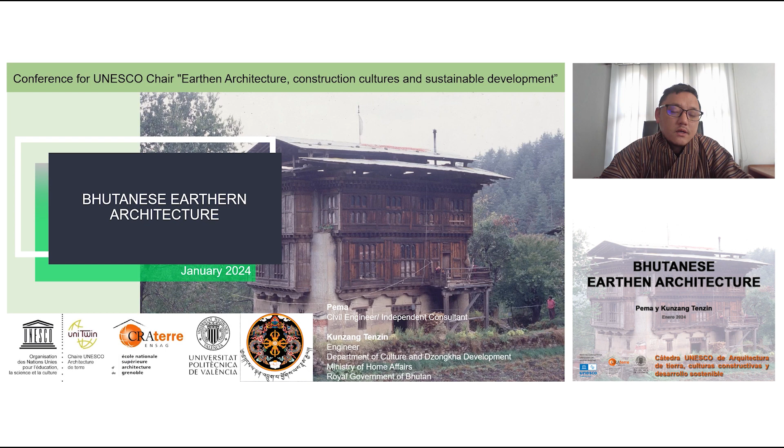First and foremost, let's discuss about Bhutan briefly. Bhutan is a small landlocked country in the eastern Himalayas in South Asia. We are bordered by China to the north and by India to the south, east, and west. We are a population of around 700,000, and the total land area is about 38,394 square kilometers, with altitude ranging from 150 meters to 7,550 meters above the mean sea level.

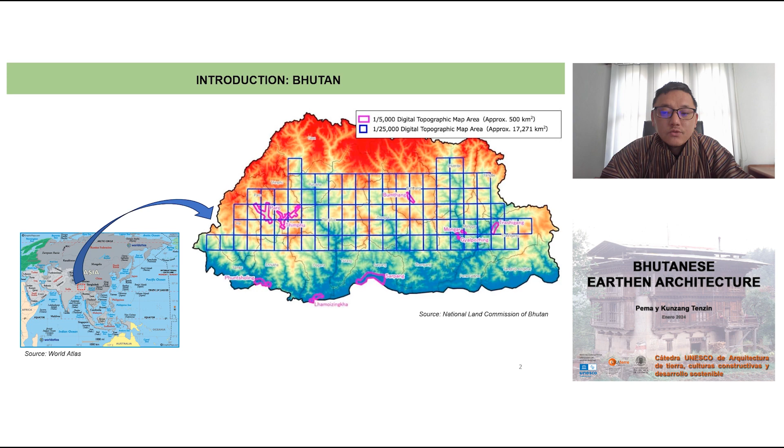Bhutan is well known for the development philosophy of gross national happiness. There are 4 pillars: sustainable socio-economic development, environmental conservation, and preservation and promotion of culture, all under the framework of good governance. I share this insight to emphasize that the thriving traditional construction practices in Bhutan are deeply rooted in the foundation laid for the preservation and promotion of culture. The Bhutanese vernacular houses play an integral role in shaping the unique cultural landscape of Bhutan.

Before we delve into the tangible aspects of earthen architecture, I would like to emphasize the pivotal role played by the intangible cultural heritage and expression in sustaining our traditional construction practices.

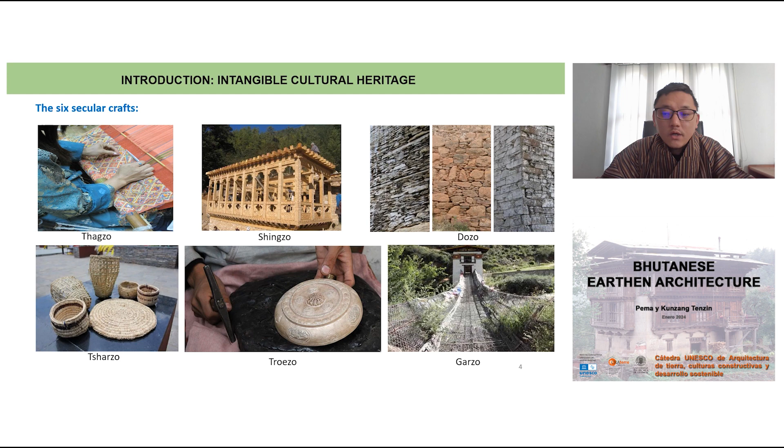There are 6 secular crafts such as weaving, woodwork or carpentry, stonework, bamboo and cane weaving, gold and silver smithing, and blacksmithing. Additionally, there are 7 religious arts and crafts such as painting, sculpting, carving, calligraphy, bronze casting, paper making, and embroidery. The continuity of these practices, still actively followed, ensures the preservation and promotion of skills and knowledge that are essential for constructing our traditional vernacular houses and monumental structures in Bhutan.

This interplay between the tangible and the intangible aspects forms the bedrock for Bhutan's rich cultural heritage, and it has also influenced the distinctive architectural landscape that you can see now here in Bhutan.

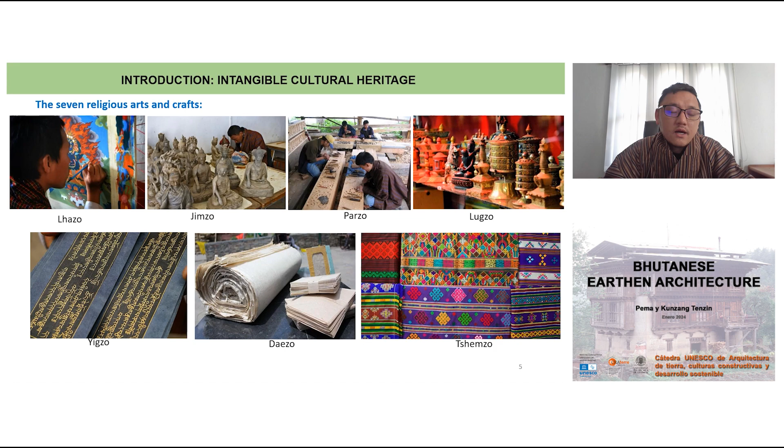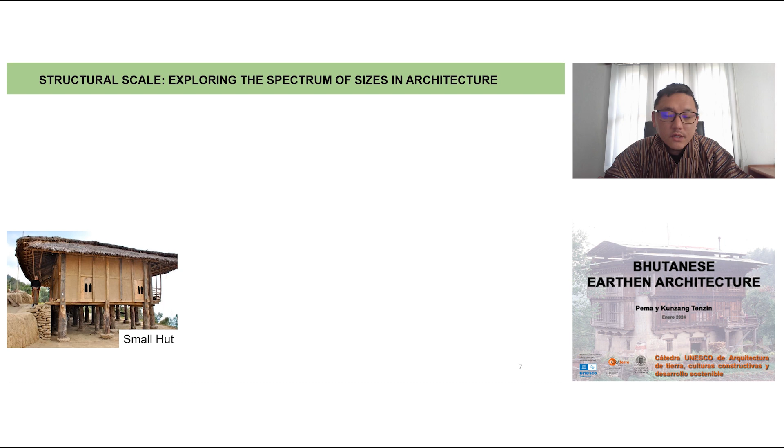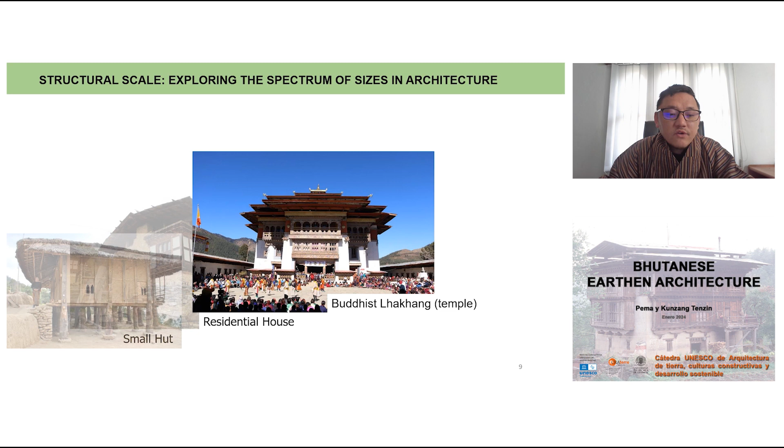Now let's explore the diverse spectrum of architectural forms for built structures in Bhutan. It ranges from very modest and simple huts, constructed using timber and bamboo materials, to elaborate residential dwellings. Further, we have temple architecture and the grandeur of the largest monuments like Dzong architecture. These are fortresses, and therefore Bhutan showcases a remarkable array of built structures.

In essence, we can see that the spectrum of architectural sizes and forms encapsulates the harmonious blend of tradition, functionality, climate, and cultural expression.

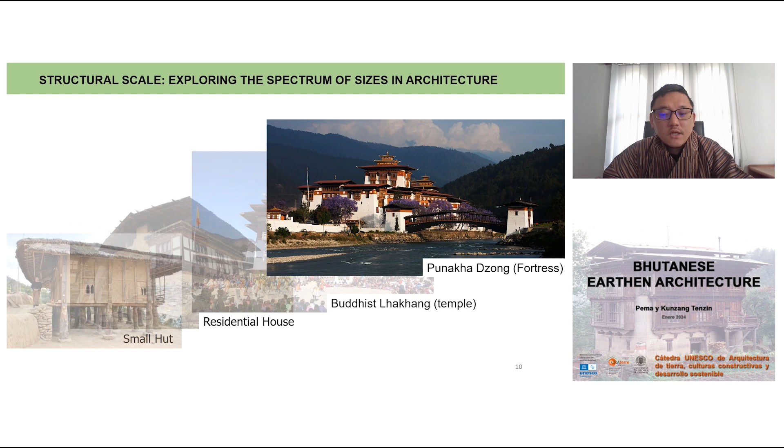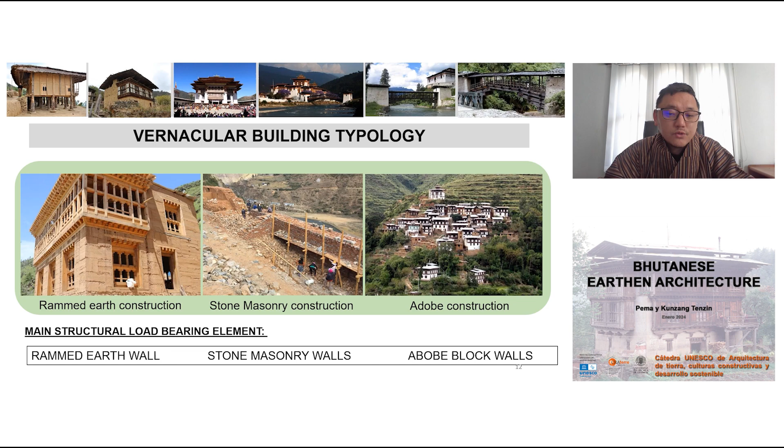Now going into vernacular Bhutanese construction, there are mainly three main types of construction typologies. One is rammed earth construction, then we have stone masonry construction, and adobe construction, which utilizes soil materials. Rammed earth buildings are commonly found in the western part of Bhutan, while stone masonry in mud mortar is prevalent in the eastern part. Interestingly, both of these construction practices coexist in the central region of Bhutan. Today we will focus on the rammed earth construction.

The rammed earth construction is one of the oldest construction methods in Bhutan, and it is mainly composed of massive walls made of rammed earth used in combination with wooden components.

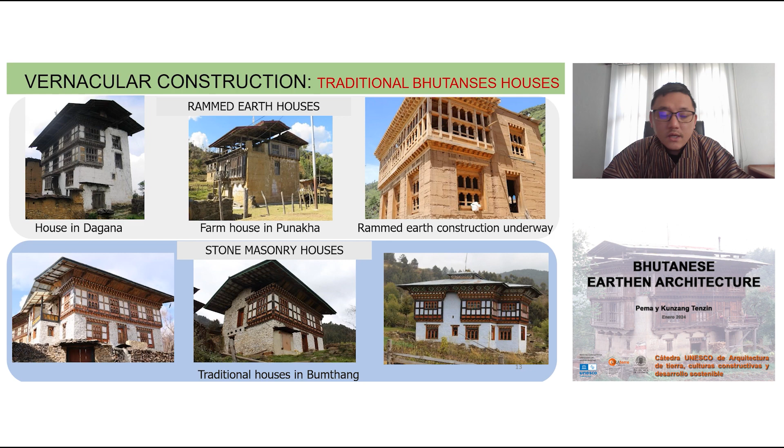Rammed earth is a popular and commonly practiced construction method where locally available soil is skillfully crafted into structures using indigenous construction techniques and skills. Timber, which is locally sourced, complements this construction style.

One important aspect related to construction of rammed earth houses is the presence of a strong communal sense of belonging, as the local community comes together to support in the construction of each other's house.

From the carbon footprint perspective, I believe rammed earth construction is one of the solutions to reduce carbon emissions. Beyond environmental considerations, rammed earth houses offer significant comfort benefits as shared by the inhabitants. The inherent thermal mass property keeps the interior warm in winter and cool in summer, contributing to the well-being of the inhabitants.

The construction of traditional houses and the rehabilitation efforts contribute to preserving and passing down traditional knowledge, skills and practices from one generation to another. This not only sustains cultural heritage but also provides local employment opportunities, fostering economic self-reliance within the community. But...

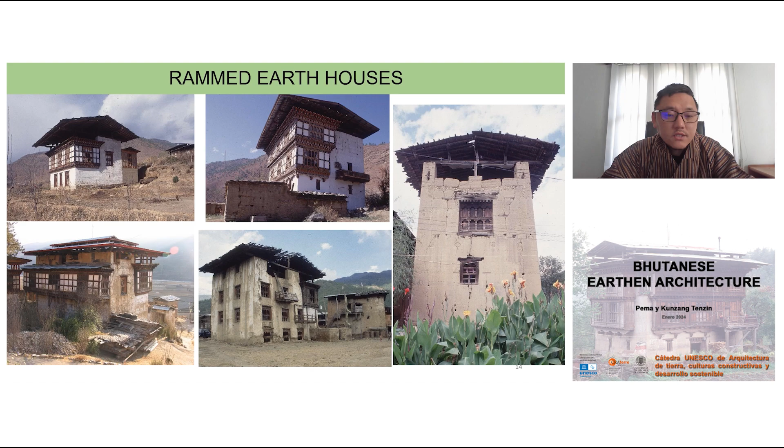Now let's look at the architectural plans and components of the vernacular rammed earth house in Bhutan. These houses exhibit a range from single-storied to four-storied structures, but the most commonly found now is the two-storied structure.

In the past, the traditional three-storied layout was more prevalent. The ground floor served as shelter for the cattle, the first floor was designed for grain storage, and the living spaces were situated on the topmost floor. However, due to shifts in policies related to health and hygiene, and personal lifestyle preferences, changes can be seen - though there may be many other reasons. Therefore the most common number of stories found nowadays in vernacular houses is two.

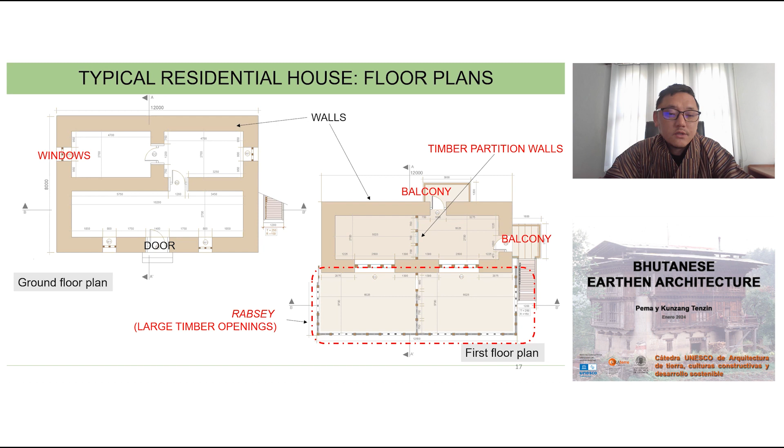Aside from the wall configurations, which depend on the owner, there is a diverse timber facade on the first floor, and each timber component has a distinct name based on its location, use, and functionality. Understanding these names is crucial if you really want to comprehend the system of constructing such houses. But I will not delve into the history and component naming aspects in this lecture.

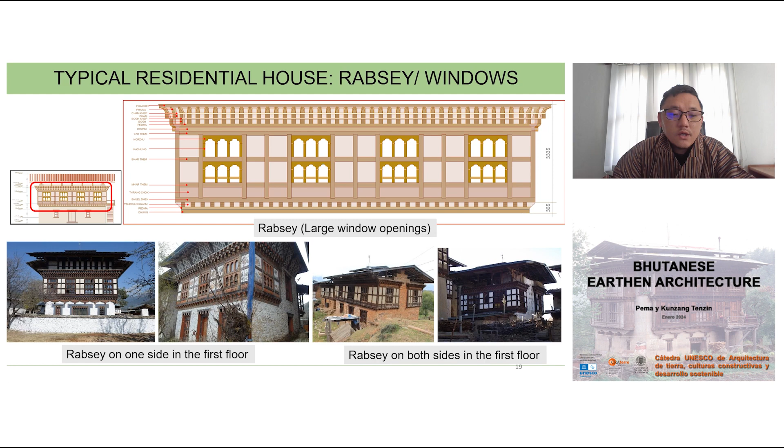Aside from the walls and architectural facade for doors and windows, the flooring system is one of the most important parts of such structures, and it usually incorporates integrated timber components. We have the timber joist, which serves as the primary structural element that transfers the load from the floor to the walls. For the intermediate floor levels, we have two wooden planks placed on top of the floor joist with a mud layer sandwiched in between.

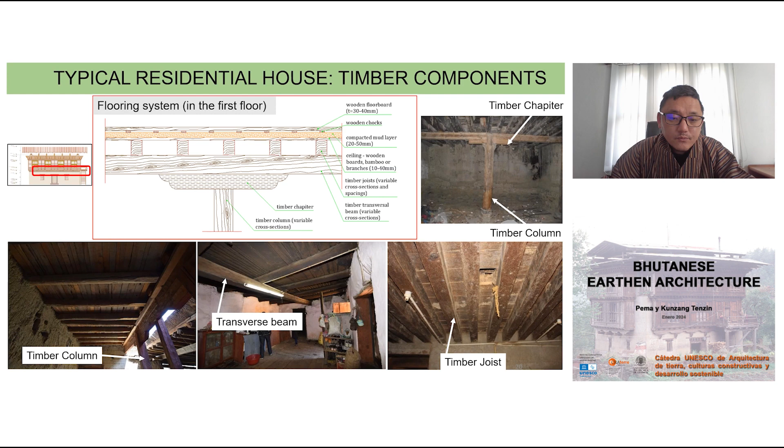For the roof level we employ the same system, but we only use one layer of timber board, which is overlain by a compacted mud layer.

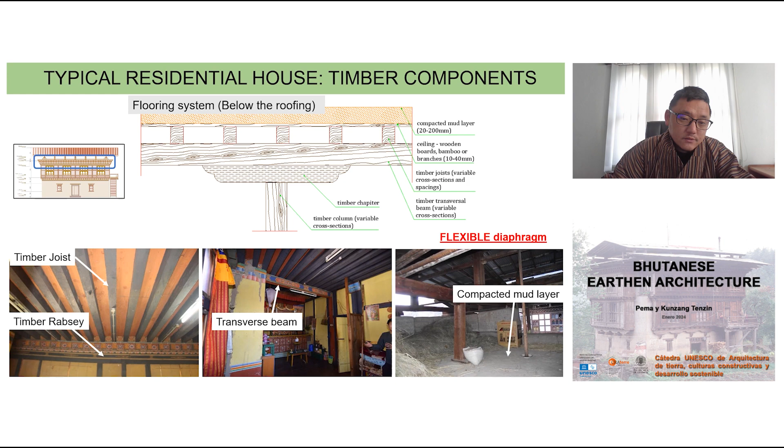Normally the timber joist finds support to the walls directly on both sides, but if you want more expansive spaces, then we employ additional support, often using timber columns. This kind of flooring system conventionally acts as a flexible diaphragm, therefore there is a need for much care and attention to ensure adequate anchorages.

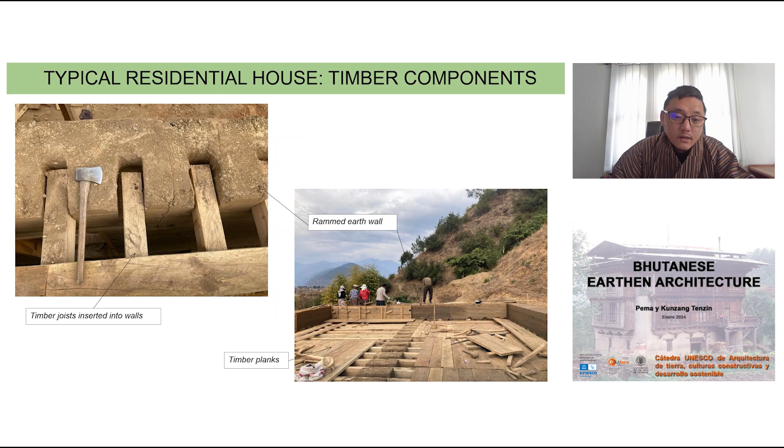Similarly, the other major component of our vernacular houses is the roof. The roofing material consists of timber elements intricately joined together using a well crafted joinery system, and we have many different kinds of joinery system. Now, because we have nails, we often use nails in these constructions. Another aspect is the roofing material itself. Previously wooden shingles were used, but now they are being slowly replaced by metal sheetings which are easily found in the market.

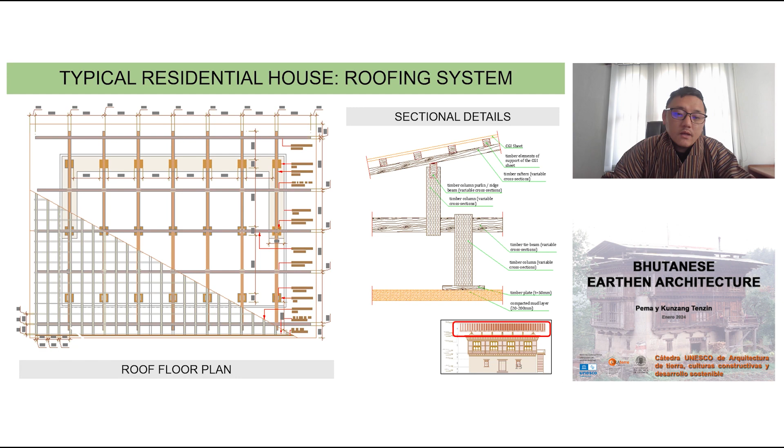From this point onwards, I will discuss the indigenous construction practices and the various structural components. I believe it's very important to understand these methods and the way we construct houses, the good construction practices, and also where you need to really focus to have a structurally and seismically resilient construction.

First and foremost is the foundation. The foundation for rammed earth structures is usually built using stone masonry walls in mud mortar, and the depth of the foundation is carefully set at a strong ground or bed stratum. The width of the foundation normally varies from 1 to 1.5 times the thickness of the main wall. Following completion of the wall foundations, the rammed walls are constructed on top of them. You can see these foundations projecting outward a little higher than ground level, just to protect the rammed walls.

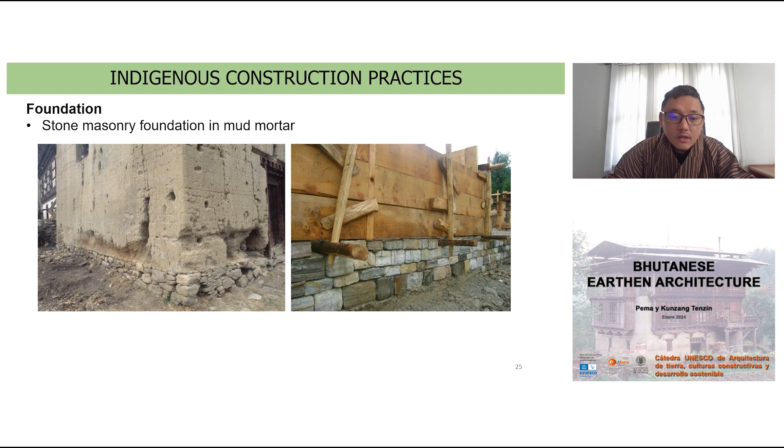For the construction of rammed walls, the selection of soil and water content holds paramount importance. Traditionally the soil is chosen through a simple lump test, often entrusted to the experienced master craftsman who oversees the construction of traditional houses in Bhutan. From a scientific standpoint, we have conducted several experiments and tests, and found that the soil composition should be a balance of sandy to clay soil, with an optimal water content ratio of around 15% by soil mass. Another aspect of rammed earth construction is the formwork, which plays an integral role.

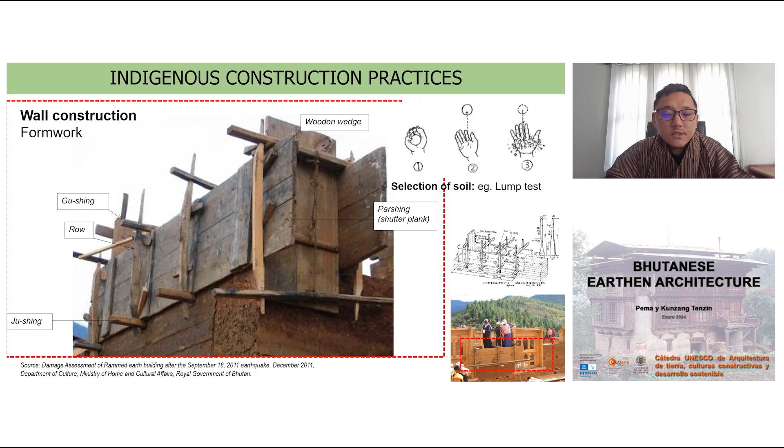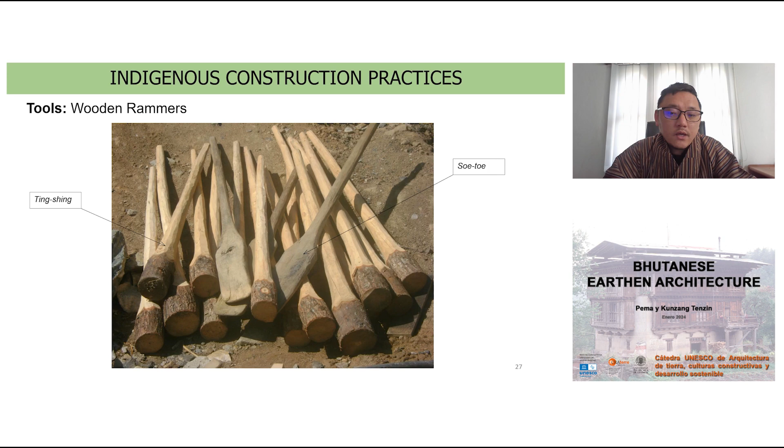Here you can see the method we employ to ram the soil for constructing the walls, how well the ramming process happens, and the synchronization involved.

We can determine whether the desired compaction is achieved by listening to the sound when you do such rammings, and also by observing the surface of the compacted soil to see whether the compaction has been achieved. But this requires extensive experience and expertise of the craftsmen or technical personnel.

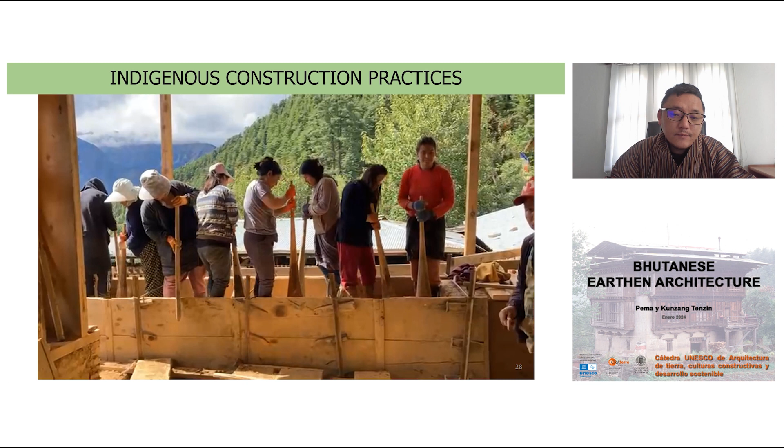In the built structure, it has been observed that the compaction of the soil layers plays a very important role in the strength and stability of the house. Typically, the rammed walls of the houses are at times plastered, and sometimes exposed. If it is plastered, you have to scrape off certain parts of the wall to check the layers. We have surveyed over hundreds of traditional houses in Bhutan, and found that older houses built before, let's say, the 1980s, which are still in very good condition, have more than 12 layers in one block, with each rammed block having a height of more or less 600 mm.

The wall thickness for older houses ranges around 800 to 900 mm for two-story or three-story structures. The average compacted soil layer has a thickness of around 50 mm. We have conducted several tests to check this, and we found that newly constructed houses tend to have fewer layers, with an average thickness of 100 mm.

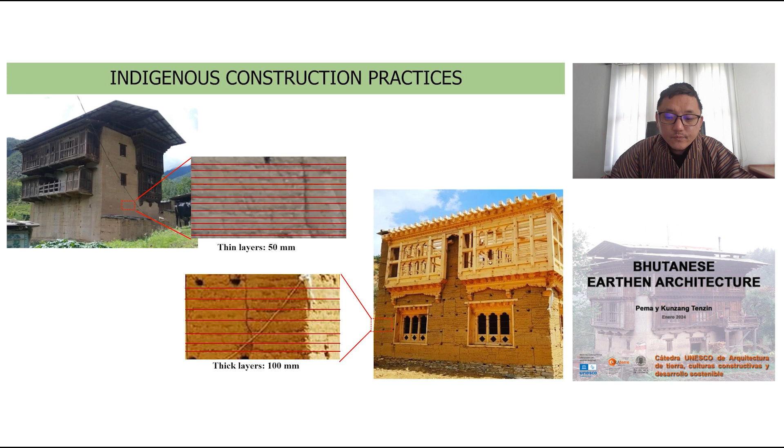Here you can see the difference between a well compacted and not so well compacted soil layer. Often when the compaction of the walls is well executed, it's very difficult to discern the individual wall layers, because you see a very homogeneous wall block. The wall layers and thickness are very important parameters when carrying out not just construction of new houses, but also conditional assessment of existing structures.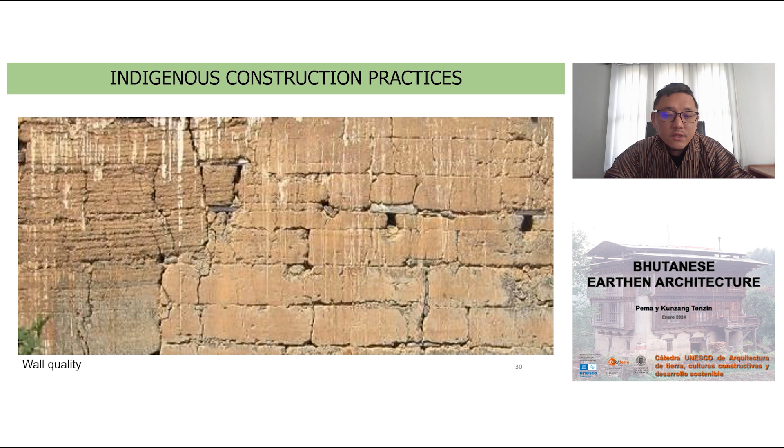In addition to material properties and dimensions, another key parameter in rammed houses is the three C's: connection, connection, connection. As you know, connection is very important in load-bearing structures.

In rammed houses, the rammed blocks are constructed individually, and thus it is very important to have very good and proper connections. Here you can see that even in vertical construction, the two superimposed blocks have to be overlapped at corners and also at wall intersections to avoid the creation of vertical joints.

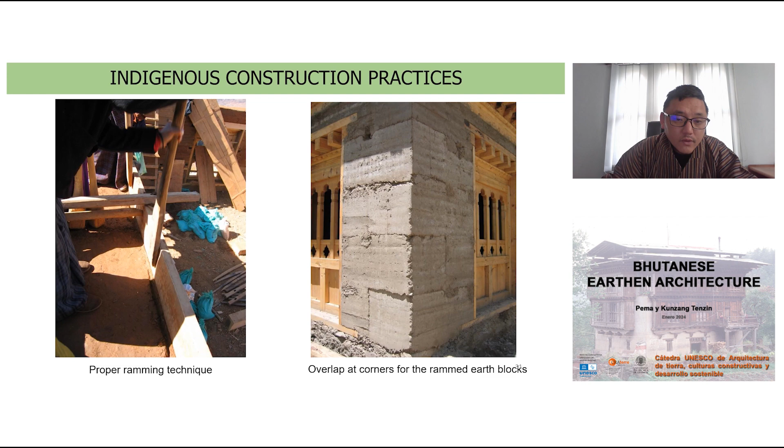Traditionally, there are many good construction systems or practices that have been employed, and one such measure we could see is the use of timber or small stone slabs placed at the intersection of the rammed blocks. This is also to achieve a good connection and avoid propagation of cracks.

Furthermore, we have the system of tapering the walls, and there are more than two ways of tapering them. The commonly found method is the outer wall being tapered, and this also contributes to the lateral strength and global stability of such houses.

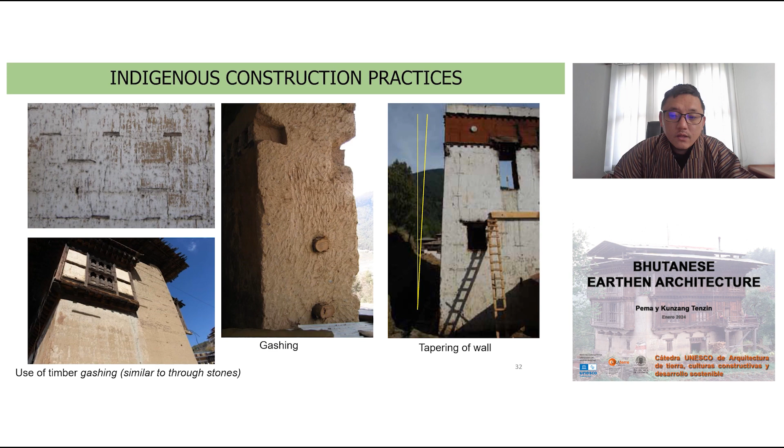As we surveyed the ruins and buildings damaged by fires or earthquakes, we could see how the former craftsmen devised ways to make good connections using timber locks, often placed at the intersection of the walls and also at corners. It is challenging to find such practices in existing buildings, but we found that houses with such incorporated techniques experienced minor damages during the last earthquakes that happened in Bhutan.

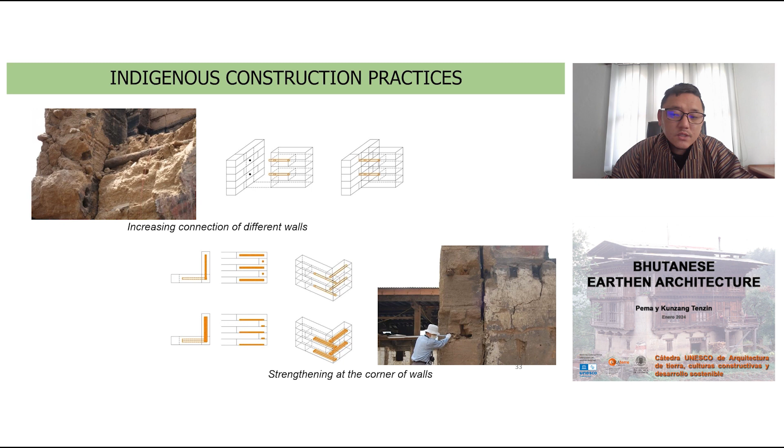We could also see similar methods of using timber blocks and stones for crack stitching as well.

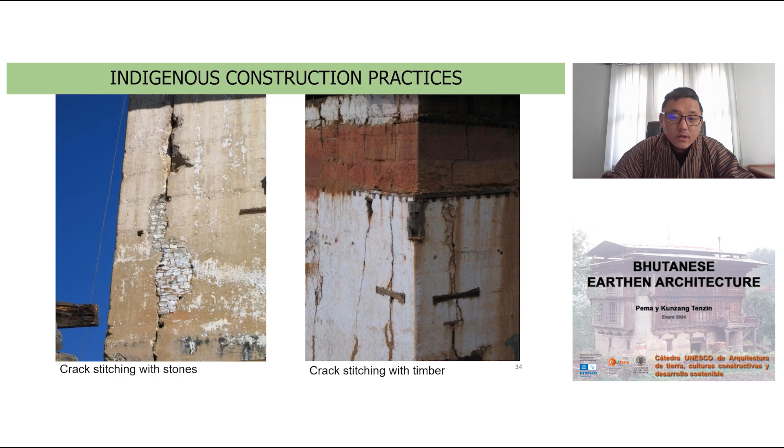Also, in rammed houses, the use of timber is extensive, and timber components and elements play an integral role in the construction of such houses. These timber elements, for doors or windows or other elements, are crafted using traditional tools and skills, but following a component-wise approach. The components are constructed in carpentry workstations, then transported and reassembled on site using robust joinery systems. This kind of fabrication and assembly technique proves to be very practical and efficient in construction works.

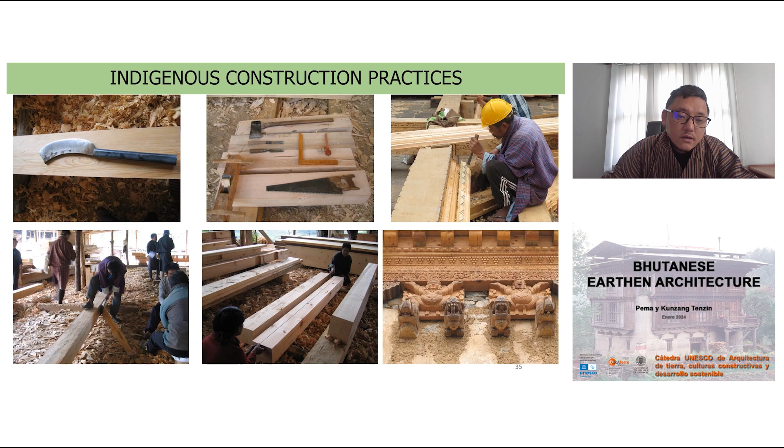Before the 1960s, Bhutanese craftsmen used an anthropometric scale of construction, that is the human scale, resulting in a unique measurement system with diverse scales and forms. But this has now been replaced by the use of easily available measuring tapes with standardized sizes.

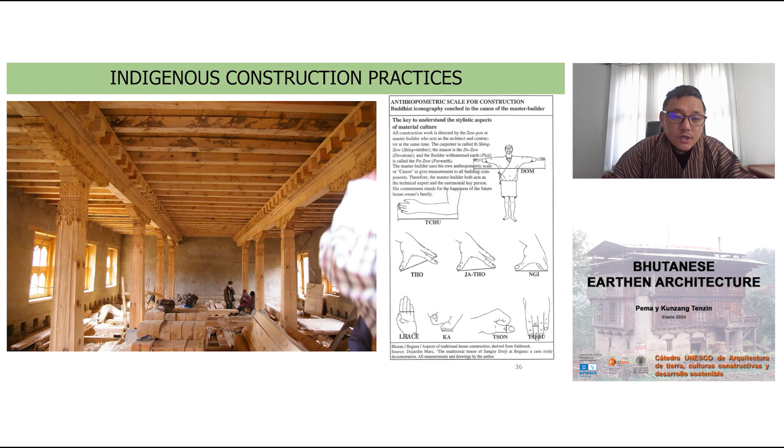I also want to share with you the evolution of traditional Bhutanese rammed earth houses. This is based on research findings jointly carried out by the Department of Culture and the Tokyo National Research Institute for Cultural Properties to understand the typology and chronology of rammed earth houses in Bhutan, showing how our traditional houses have evolved over time.

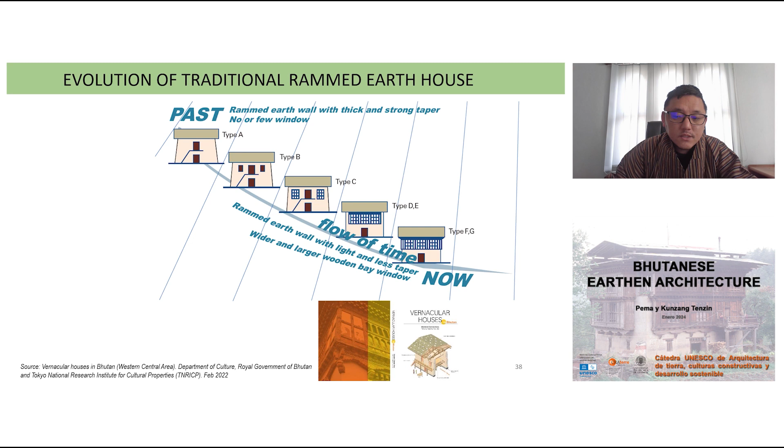One of the guiding factors in this research assessment was based on the openings. The older the house, the fewer the openings. In contemporary times, inhabitants prefer more openings, which has led to the reduction of number of walls. With the increase in wall openings, this significantly reduces the seismic capacity.

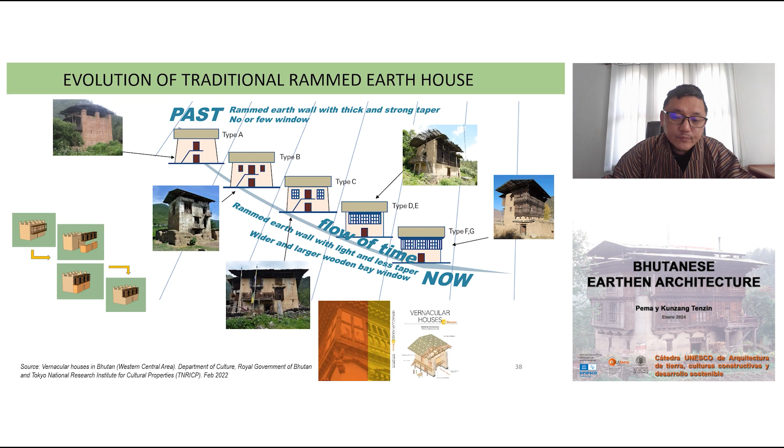These are some of the concerns, and for more detailed analysis, the aforementioned organizations have published a book called Vernacular Houses in Bhutan. The department is also working on the evolution of traditional stone masonry houses, and this research is currently underway. From here on, I would like to discuss recent trends and research works for earthen construction in Bhutan.

Bhutan is situated in a highly seismic prone region, and we have experienced medium level earthquakes over the last few decades. Prominently in 2009, there was a 6.1 magnitude earthquake that affected the eastern part of the country. We have more stone masonry houses there, so a lot of stone masonries were damaged.

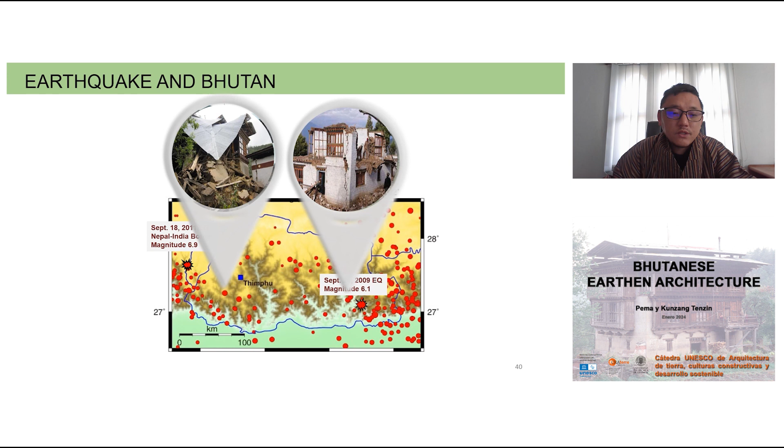Subsequently in 2011, there was another earthquake of magnitude 6.9 that affected the western part of the country, and the rammed earth houses were damaged. It was an opportunity to learn about the construction practices and systems, and we have also published a damage assessment book after this earthquake.

These earthquakes have raised concerns and misconceptions amongst the Bhutanese populace regarding the strength and stability of such vernacular houses. In response, the Department of Culture has initiated numerous scientific research works to understand the behavior of such houses since 2011.

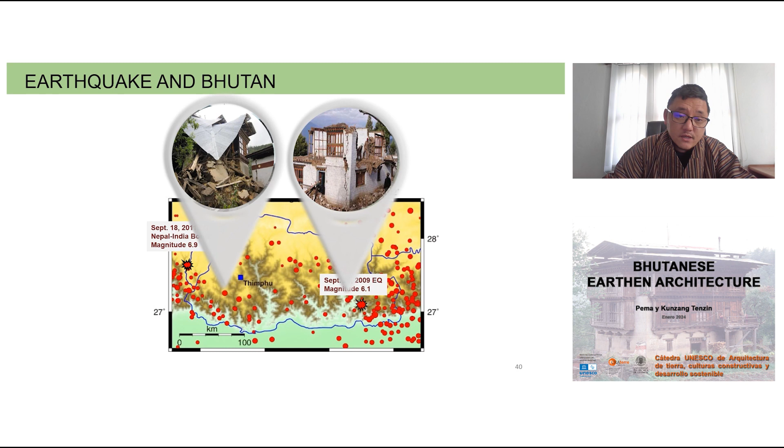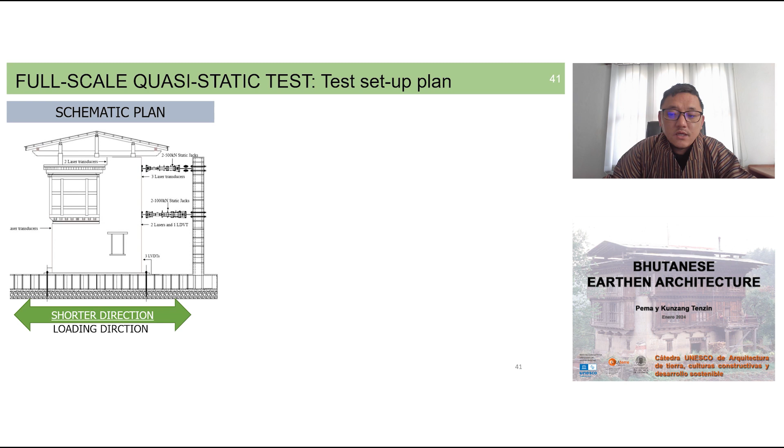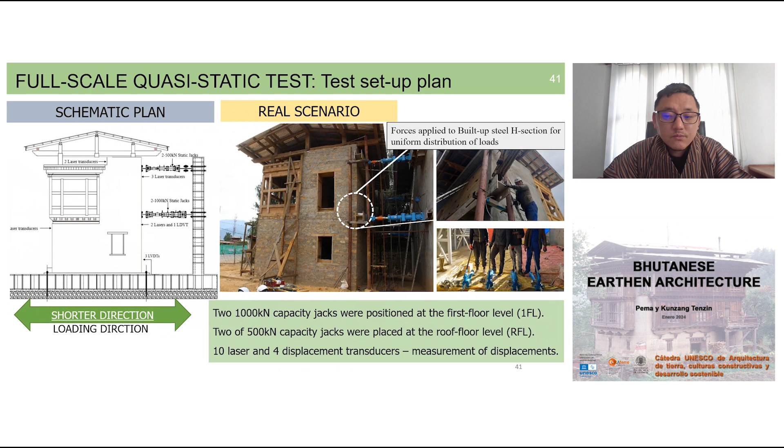I want to share one significant achievement in Bhutan while I was working for the department: the establishment of a test facility capable of conducting full-scale static tests and also dynamic shaking table systems through the SATREPS project, which was funded by JICA and JST, and partly funded by the Royal Government of Bhutan.

Using this facility, we have conducted numerous experimental works to understand the behavior of Bhutanese rammed earth and stone masonries. We have also published and developed several guidelines and manuals, which I will show later.

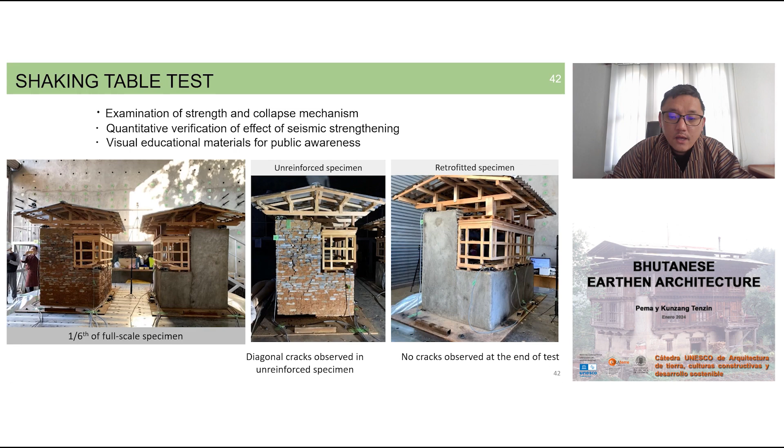Based on these guidelines, we have implemented rehabilitation work. One such project we carried out is the rehabilitation and seismic strengthening of a traditional two-storied rammed earth house. This house was found to be in a dilapidated condition and not used, and the team carried out a detailed survey and documentation.

We used Faro for laser scanning works. We did on-site conditional assessment, we carried out structural analysis and design, and finally we incorporated mesh wrap technique and floor strengthening using steel anchors.

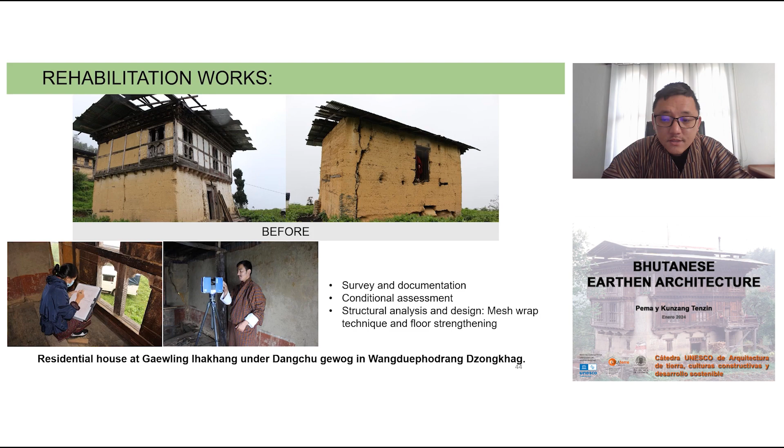As we carry out scientific and technical research, it's important we also train and disseminate information to our local engineers, colleagues and craftsmen. So after the assessment, we trained the local craftsmen and engineers, and with a good understanding of the mesh wrap retrofitting technique we adopted, they implemented it on site and completed the rehabilitation work.

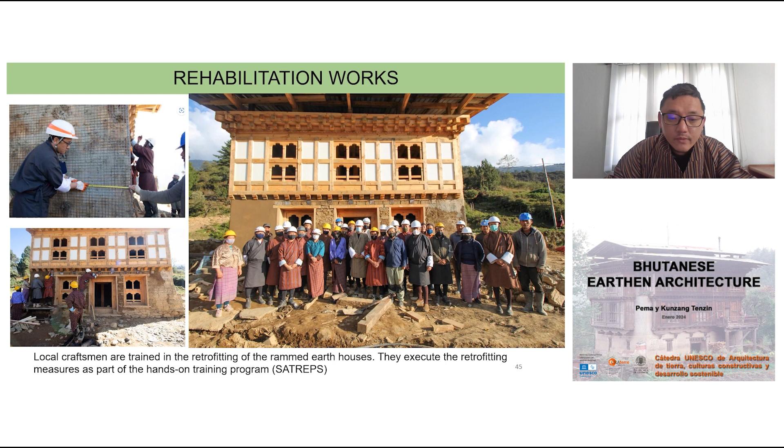For new construction, the use of a reinforced concrete band connected by vertical reinforcement encased in concrete was also introduced after conducting several experiments for rammed earth. We know such techniques were used in other parts of the world, but we wanted to make sure it works for Bhutanese vernacular houses.

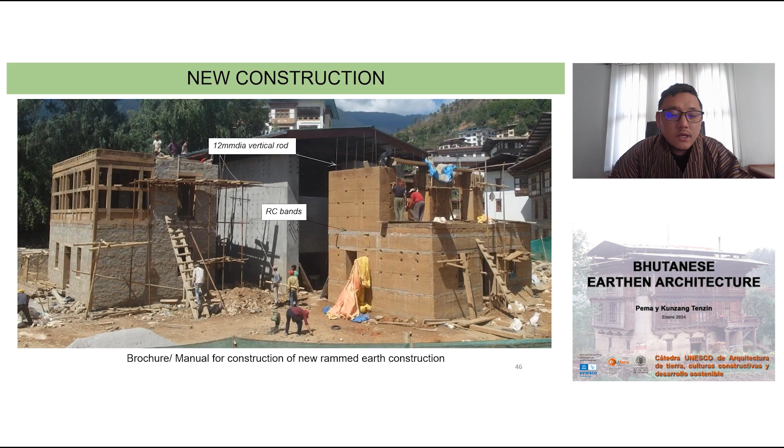We have also prepared a brochure, a very simple brochure which is easy to understand, both in English and our national language, Dzongkha, for easy understanding, showing step-by-step methods of employing such techniques.

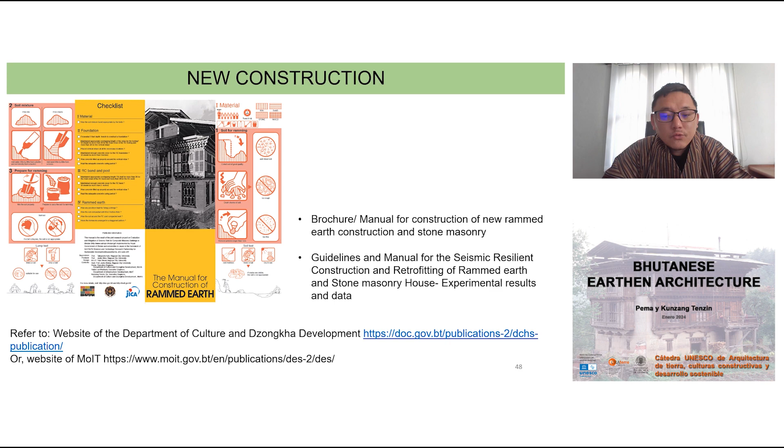I would like to conclude my lecture here, and I hope you have enjoyed the presentation on earthen architecture, especially the insights into our rammed earth construction practices in Bhutan.